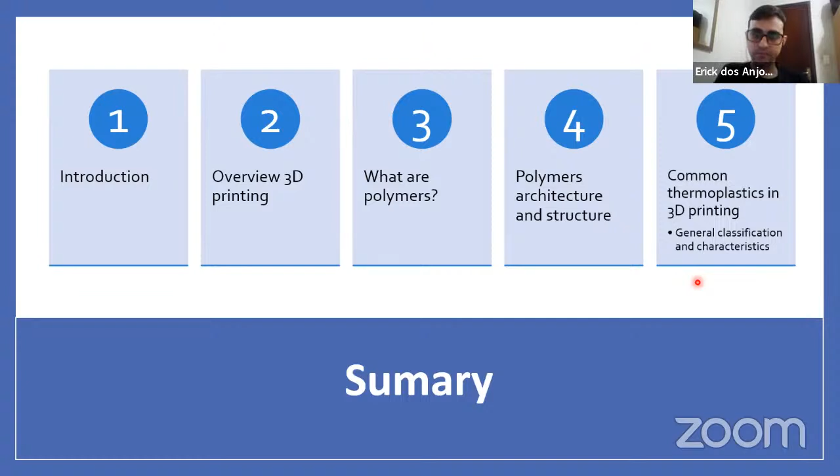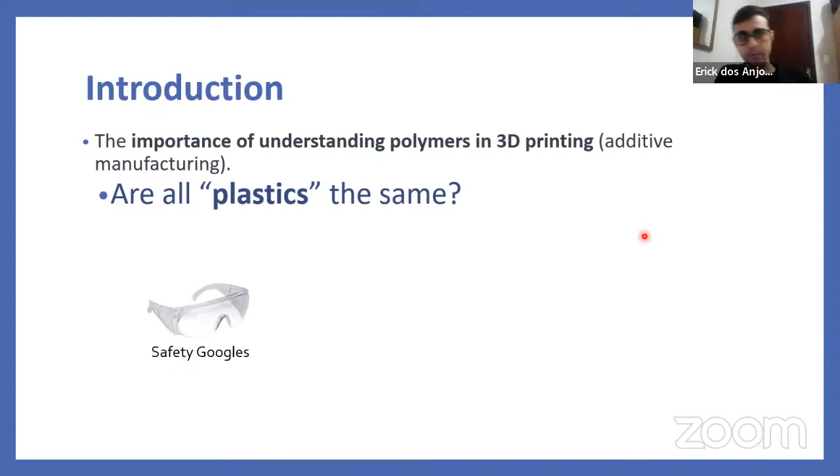Back to the polymers. Before delving deeper into the world of polymers, I think it's vital to recognize why polymers matter for 3D printing. And to start to construct this knowledge, I would start with a question. Are all plastics or polymers the same? What do you think about it? So to prove that polymers are not the same, I will give some everyday item examples here. For example, safety goggles, a pool ball, and a mattress sponge.

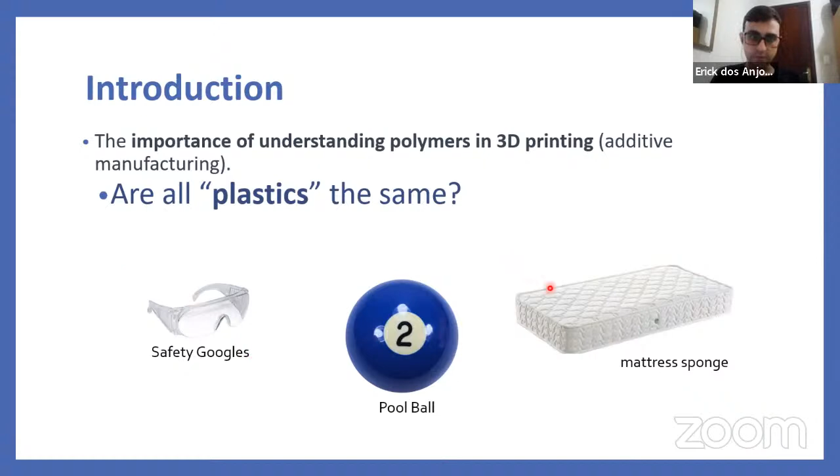The three products are made mostly from polymers. However, they have really different characteristics. A safety goggle is rigid and transparent. A pool ball is almost an elastic solid, while on the other hand, a mattress sponge is a really soft material. So why can polymers be so different from each other? This is one of the questions of this presentation.

From the previous question, an even more important question rises, that is, should I use the same material for all the prosthesis parts? What do you think about it? I think most of you think it's best to use the same material. Some of you diverge in this opinion. And this is a question that we will go back to at the end of the presentation.

Okay, so now, knowing that we are here at e-NABLE and the focus of e-NABLE is 3D printing, I think most of you have contact and experience in 3D printing. So I'll just have a quick review of some fundamental concepts of 3D printing.

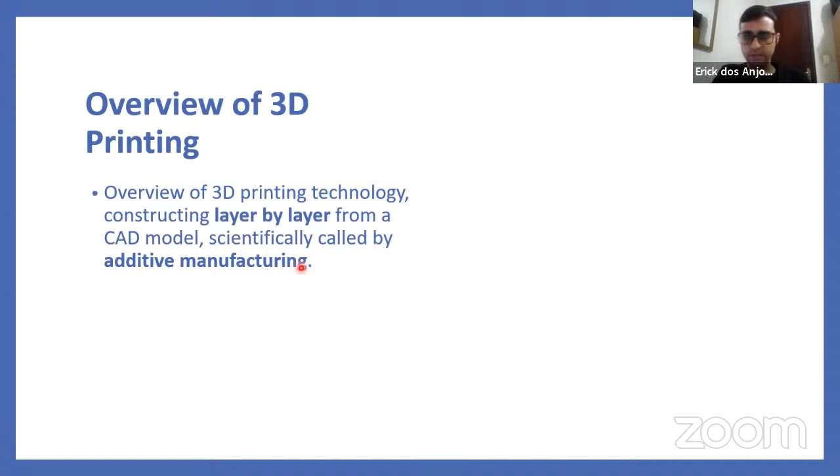So at its core, 3D printing is a family of manufacturing processes that builds any object, trying to construct the object layer by layer. And the idea is always based on a digital model. So 3D printing is really advantageous when we look for versatility, when we look for maximizing the material, so minimizing material wastage.

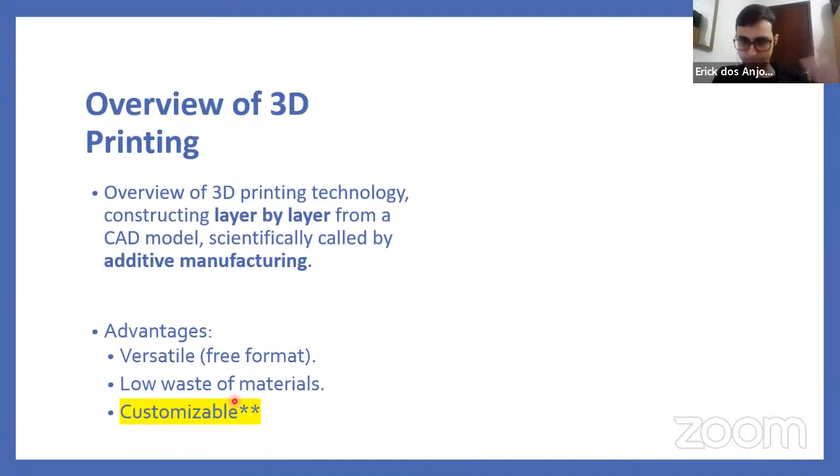And the strongest characteristic of 3D printing is the customization capabilities. Yes, so for medical devices and other industries like the aerospace industry, customizability is a really strong focus of 3D printing. Here we can see that 3D printing is actually the most cost-effective manufacturing technique for lower quantities, so customizable pieces.

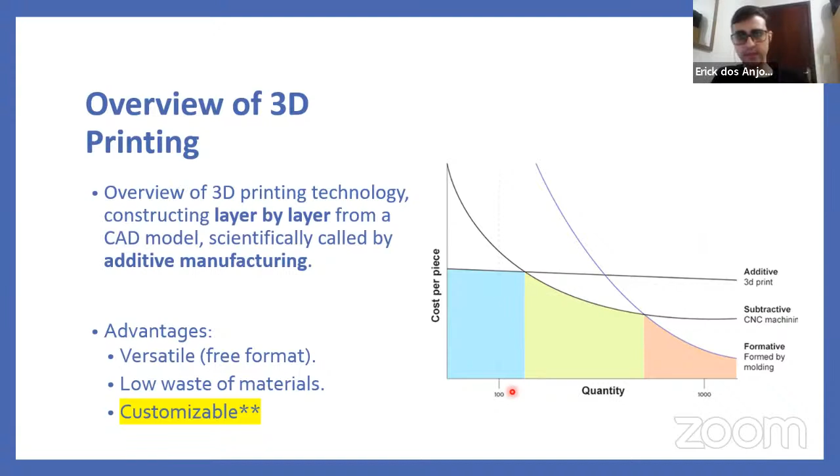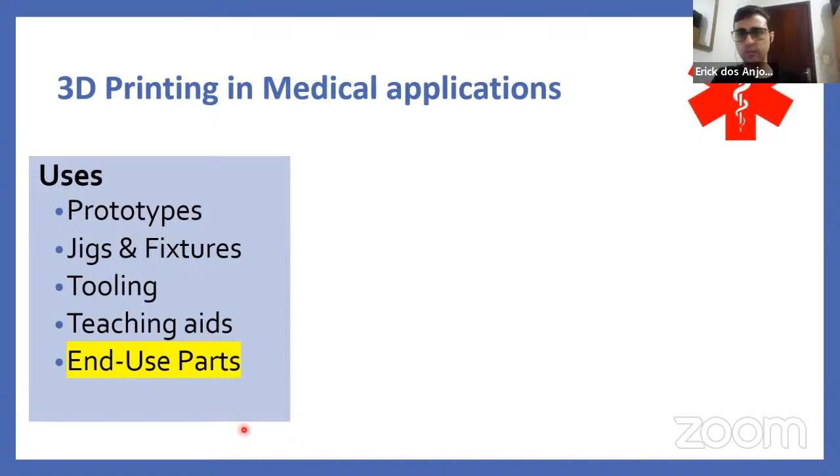One of the main applications of 3D printing is medical applications. In medical applications nowadays, 3D printing is used for prototypes, tooling, teaching aids, and in the case of e-NABLE for end-use parts also. And the great advantage of 3D printing in this case of medical applications is customization. However, medical applications have unique requirements.

The most difficult requirement to achieve for polymers is sterility, because for sterility we must undergo some severe physical conditions like higher temperatures, radiation exposure, chemical exposure, for example. All those can be harmful for the polymer structure in some cases, so not all polymers will satisfy sterility.

Another requirement for medical applications is traceability, so not all polymers are commercialized to be traceable. It's another difficult requirement to match. And the easiest to match for 3D printing is organic shapes, independent of being a polymer or other material.

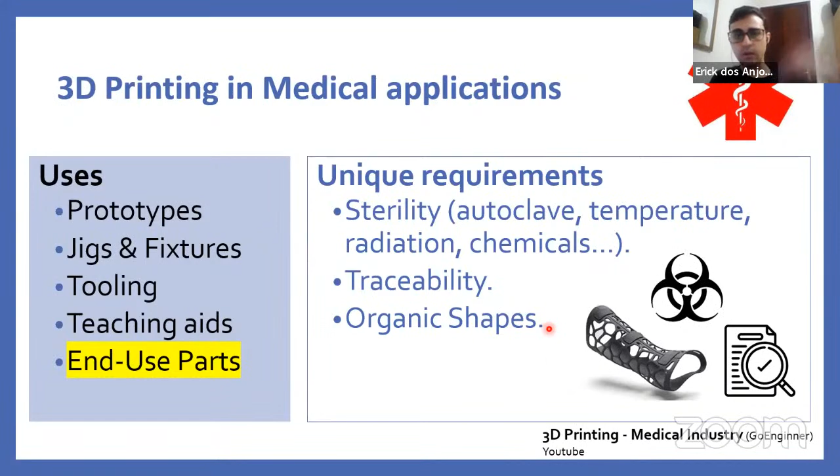Moving forward, we should understand that additive manufacturing encompasses a range of processes involving various materials and strategies. In this presentation, I'll focus on just polymer materials. So the techniques that apply most polymers are vat polymerization and material extrusion. Vat polymerization is commonly known as stereolithography, while in material extrusion, the most known process is FDM or FFF, the one that you use in e-NABLE.

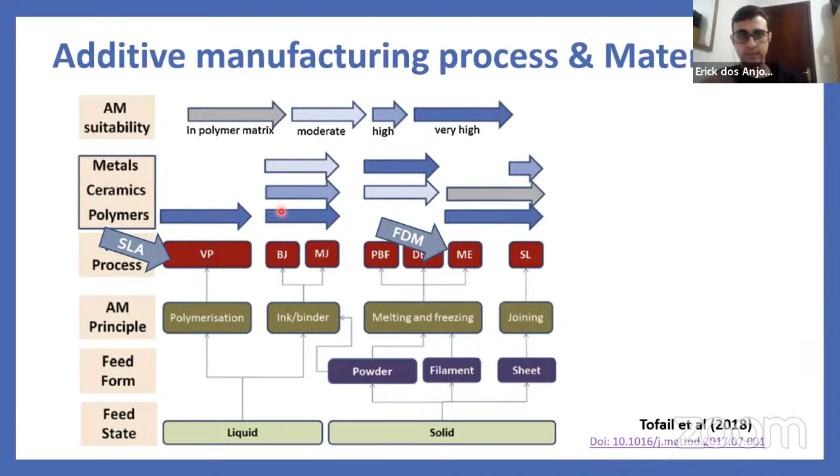So these two processes mostly apply polymers. This is why we're going to focus on polymers and especially on material extrusion in this presentation. However, we have other additive manufacturing families that can apply almost all types of materials: ceramics, metallics, composites, etc. Finally, with this brief foundation of 3D printing, we can delve into the core of the presentation, understanding the nature of polymers.

So polymers can be defined in various ways, okay? The most common definition is defining polymers as long chains or networks of repeating molecules, also called macromolecules. And what does it mean? It means that we have the same structure repeating multiple times to form the polymer itself, okay?

There is a big field to study polymers that we call polymer physics and chemistry. However, here I'll just give a brief introduction about this field, the main aspects that you have to keep in mind to better understand polymer physics and chemistry, okay? And I think the easiest way to approach this is from the materials engineering point of view, where we base the classification of polymers on their properties.

So we can have three major distinctions of polymers based on their properties. There are thermoplastics, simply called plastics, thermosets that come from liquid resins, and rubbers, okay? When we talk about thermoplastics, we have these two. They are the most used, the most known and simplest thermoplastics: polyethylene and polypropylene. These materials are just constituted by the simple structures here, repeating multiple times, forming long, independent chains.

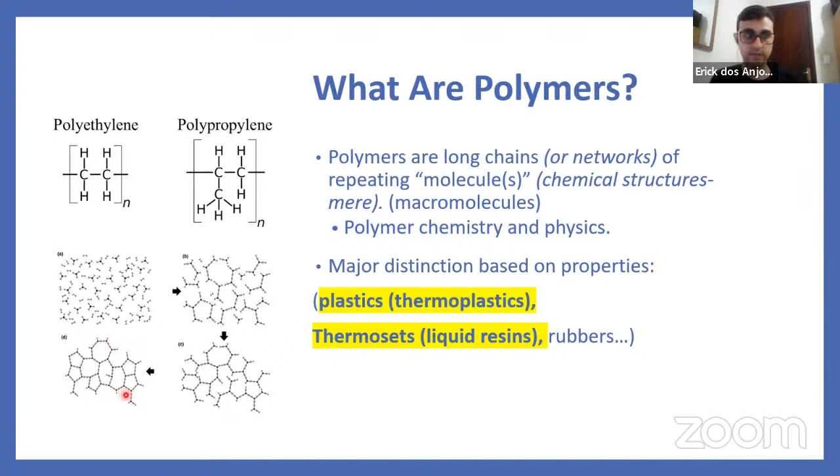Let's focus here more on thermoplastics. I think it is the material that we use most for e-NABLE end-use applications. We can have different kinds of thermoplastics. If you have one repeating structure like polyethylene, we call it a homopolymer. However, if you have more than one, we can make different types of structures called copolymers.

And copolymers can have different architectures and structures. These two terms here describe how the molecules bond to each other to form the polymer chains. And we can have different types of copolymers, alternating or block, for example. We can have different shapes of polymer chains.

This is important because, for example, with the same homopolymer, for example, polyethylene, if we change the chain configuration, we can have different properties of the polymer in the end. For example, linear polyethylene generally comes from high density polyethylene, which is tougher and stronger than a branched polyethylene that we call low density polyethylene that has longer branches here. So just changing the configuration of the chain, we can have different properties.

We can also have different types of polymers bonded together. In this case, we have grafted copolymers, where we have one backbone of one polymer and grafted chains of other types of polymers. This kind, for example, is the same that we see from ABS that I will talk about a little bit later. It is also an example that we can use this type of technology in a real-world application, a material that's already commercial.

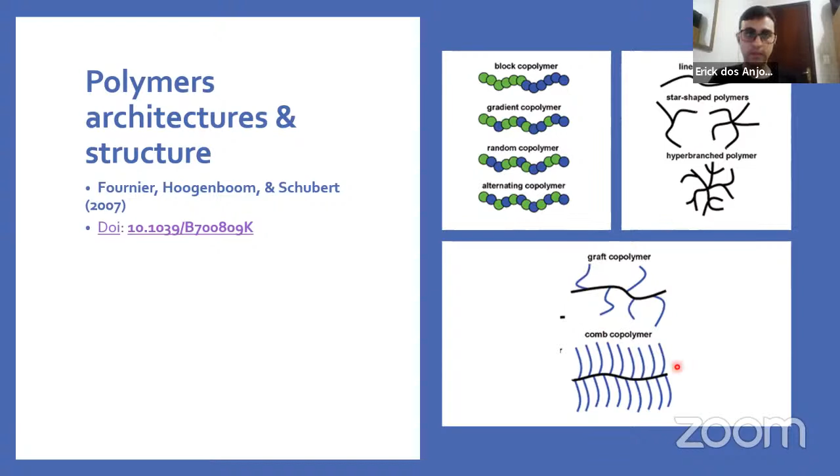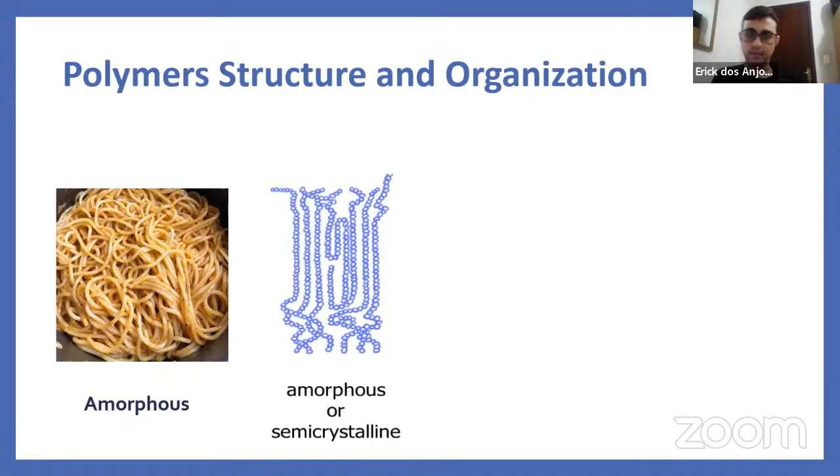Moving forward, we can talk a little about the structure and organization of polymers. So polymers in the solid state can also be differentiated in two categories. We call them amorphous and semi-crystalline polymers. When we picture amorphous polymers, we can imagine a plate of pasta. There are many strands intertwined and connected to a few others, not chemically, but just physically, they just anchor themselves. And when we pull one strand, you can move many others around it. So it behaves like a solid at room temperature, for example.

And we have another category that is semi-crystalline polymers. Semi-crystalline polymers have these crystalline regions called lamellae. These lamellae can be pictured, again as a culinary example, as a ramen noodle, where the same strands are folding and bending into each other to form a more packed, more regular structure. And this structure confers to the amorphous matrix many different kinds of properties. So it's more rigid, it's more resistant to solvents, to gases, for example.

And generally, these polymers can arrange the crystalline and the amorphous regions in many different structures. An example is these spherulites here, which are a regular circular structure of lamellae and amorphous regions.

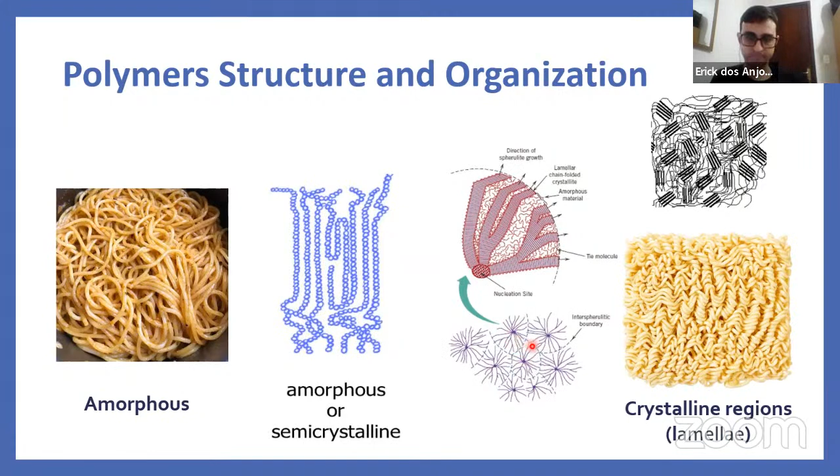The last part here that I will discuss about polymer architecture is the molecular weight, which is also really important for polymers. So having the same chemical structure repeating different times, which is indicated by this number here, N, which is the polymerization index, we can have different properties. I will show a practical example. For example, with this structure of polyethylene, if we repeat it just a few times, 12 to 18, we can have paraffin wax, which is a small molecule, not classified as a polymer, and has a lower melting point, okay, around 50 degrees.

If we increase this polymerization index to a higher number, for example, 3,000 to 4,000, we have HDPE, which is a polymer in this case with a melting point around 110 Celsius degrees, almost double that of the paraffin wax, and has excellent mechanical properties, tensile strength and modulus.

If we increase the polymerization index even more, we will have a polymer called ultra-high molecular weight polyethylene that is virtually not meltable. So you destroy the polymer before melting it, with a polymerization index really higher, 400,000, for example. This polymer has extremely good mechanical properties, however, it is really difficult to process, for example, so it's not much commercialized.

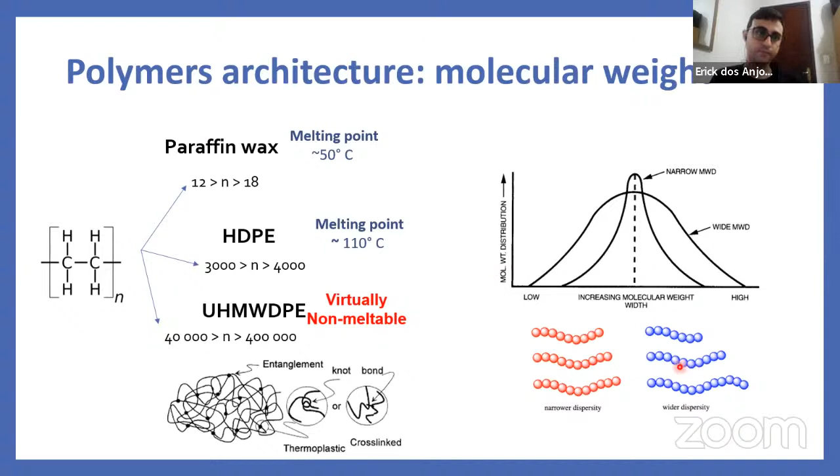Okay, so with this brief presentation of the main characteristics of polymer physics and chemistry, we can dive deeper into common thermoplastics focused on additive manufacturing. So when you imagine plastics for additive manufacturing, especially for FFF or FDM processes, we generally can classify these thermoplastics based on their properties. Again, in this case, we can divide them based on their maximum temperature of application, but it also stands for price or mechanical strength, for example.

In this classification, we can classify these plastics as standard, engineering, or advanced plastics. Standard plastics are applicable just at room temperature up to 100 degrees. If you need a material that resists heat more, we can have engineering plastics that resist up to 150 Celsius degrees. And if you need a really extreme condition, like up to 350 degrees, we will need advanced plastics. It's important to notice that price is another characteristic that varies a lot with the type of polymer we are talking about.

For example, when you compare PEEK, which is an advanced thermoplastic, its cost could be around $400 to $700 per kilogram, while a standard thermoplastic like ABS has a much lower price, around $17 to $25 per kilogram. This is just an example.

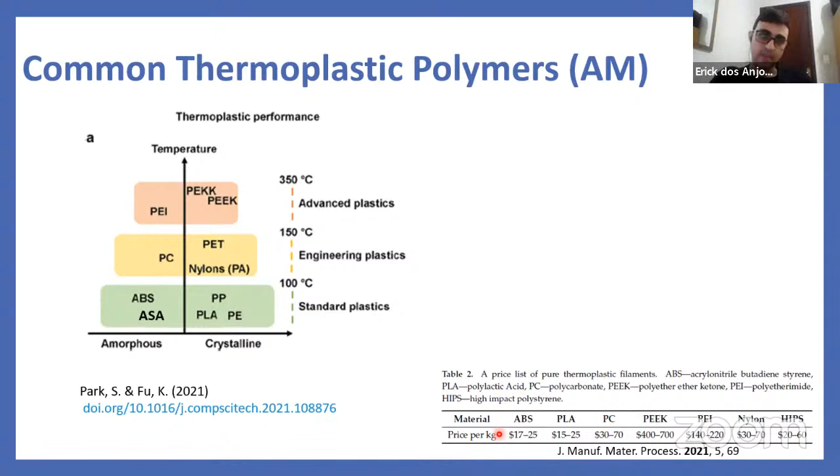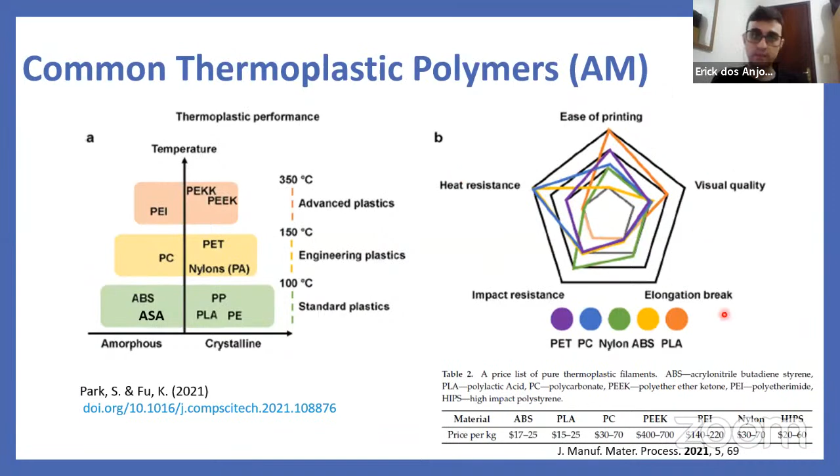Now let's take a closer look at the main characteristics of each polymer shown in the last slide. Each polymer has its own set of characteristics. For example, when you talk about application temperature—the temperature the material will be used at—this is limited by two characteristic temperatures. Polymers that are amorphous are characterized by their glass transition, while polymers that are semi-crystalline are characterized by their melting point or melting transition.

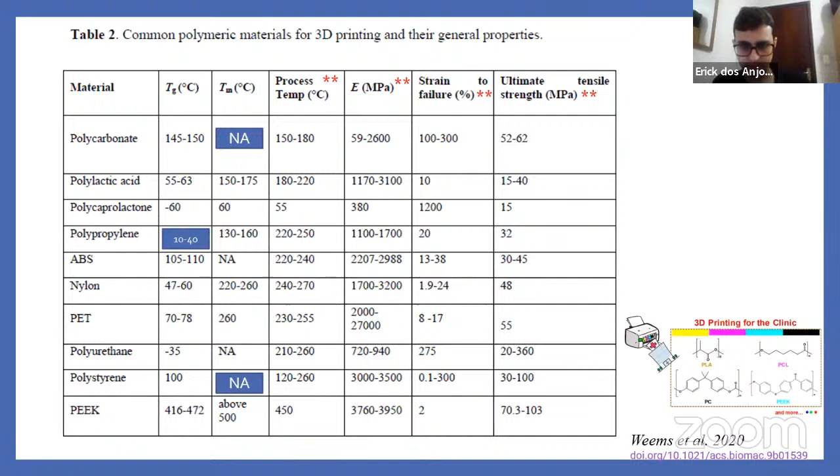When we talk about polymers for 3D printing in general, there are significant benefits. Polymers are the most cost-effective materials, they're versatile—different kinds can fit almost any application—they're light, and they're mostly recyclable in the case of thermoplastics. Some thermoplastics are even biodegradable. Their strongest characteristic for 3D printing is lower energy consumption during processing, which is why we can have polymer 3D printing at home. However, metal 3D printing probably can't be done at home because it requires a much higher amount of energy to melt or fuse the metal, or to power a laser. This is why polymer 3D printing can be so homemade, unlike other types of material 3D printing.

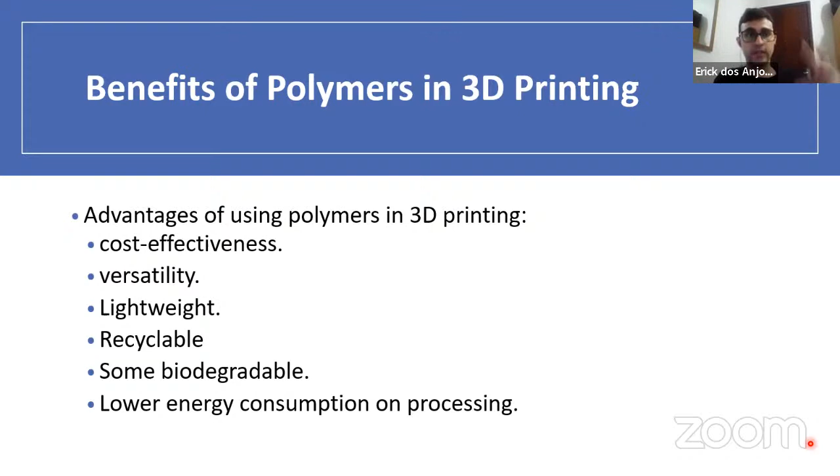So now I'll bring examples of the most applied materials, some advantages and disadvantages of applying each one, and their chemical structure, to understand a little bit how these things are connected.

The ABS matrix is a heterogeneous material, so ABS has characteristics of each of these structures. For example, acrylonitrile contributes thermal and chemical resistance to ABS, while polybutadiene contributes impact strength. This is why ABS has these types of characteristics.

ABS is a really versatile polymer. It can be applied for automotive parts, electronic housing, toys, and prototypes, and it's one of the most used polymers for 3D printing. There are some disadvantages though: ABS is really prone to warping, so if you don't have a heated table it's hard to print, and if overheated it might emit fumes.

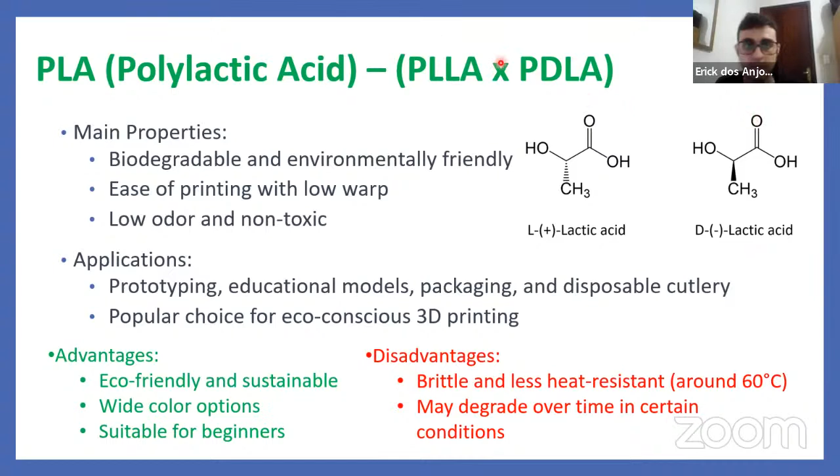It's not so easy to degrade in application conditions, okay? A curiosity here about PLA is that it has two optical isomers. Depending how the molecule is conformed, you can have L-lactic acid, or D, like PLLA or PDLA, as we call it. Commercial grades are generally mostly from PLLA, that is less brittle and easier to process than PDLA, but some grades can have a balance of both structures.

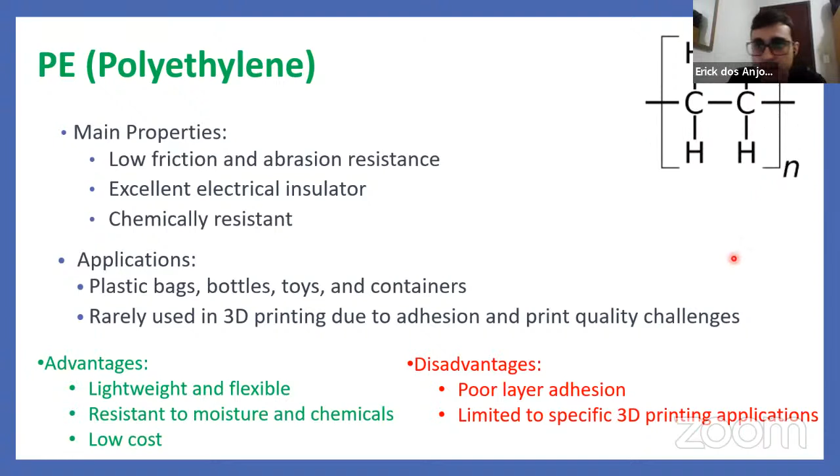Now we have other two standard polymers here, polyethylene, that I call a lot in this presentation. This is the simple structure. Polyethylene is actually in our daily lives, for example, in plastic bags. This polymer is versatile, has excellent electrical insulation and chemical resistance, and is really easy to process for traditional processing techniques like injection molding and extrusion.

However, this polymer is rarely used for 3D printing because it doesn't have good adhesion, neither in between layers nor in the 3D printing bed. So we have a real challenge trying to print PE, for example, due to this poor layer adhesion. This is why this polymer doesn't thrive too much in 3D printing.

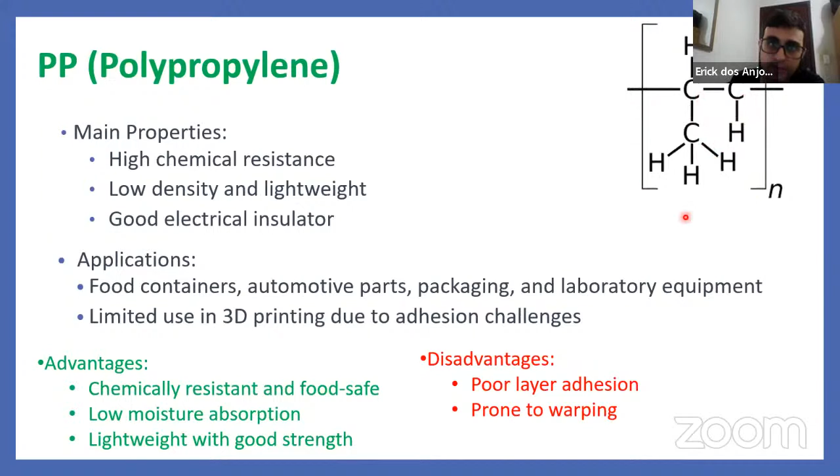Another polymer really similar to polyethylene is polypropylene, with just a methyl group substituting a hydrogen atom. This makes polypropylene harder and stronger than polyethylene. It's less flexible, but it's also stronger. Polypropylene is applied for food containers, for example, automotive parts, packaging—it's also a really versatile polymer.

It's really applied in the industry in general. However, polypropylene has the same disadvantage as polyethylene: its poor layer adhesion makes it really hard to print. So it's limited for use in 3D printing applications. This is why we don't see PE and PP in 3D printing as much as we see PLA and ABS.

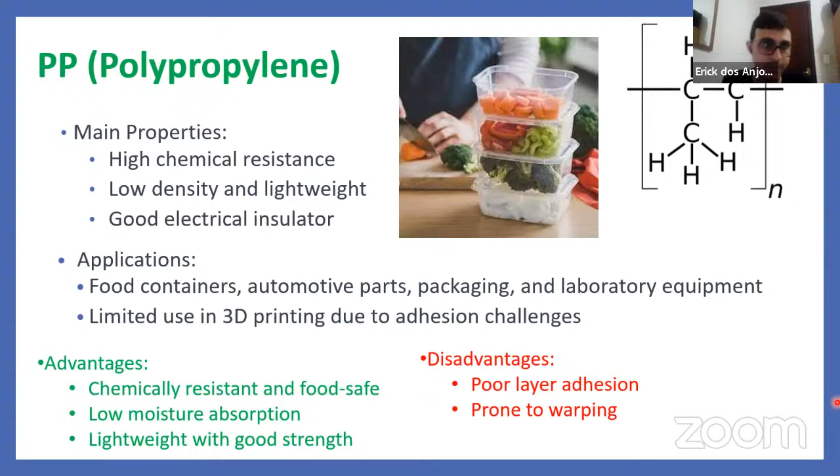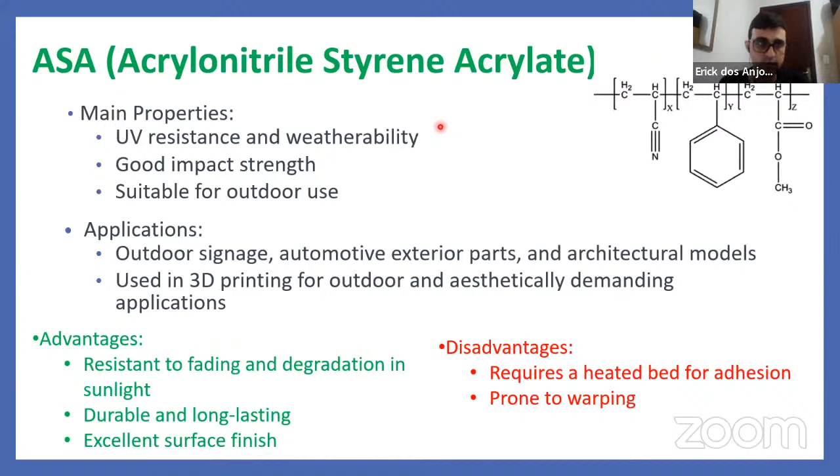The last standard polymer here we can see is TPU. TPU is standard in some cases, also considered an engineering plastic. TPU's characteristics are high flexibility, exceptional impact resistance, and good abrasion resistance. It's applied in industry for footwear, phone cases, seals, gaskets, and sporting equipment in general. It's extremely flexible and stretchable—when you're looking for a printed part that behaves like rubber, you should use TPU.

However, TPU has low heat resistance and might be prone to stringing during 3D printing. I think among all the thermoplastic polymers I'll talk about here today, TPU is the most complex one, because TPU is not just a simple chemical structure—it could actually be many different types of polymers together. For example, here I just showed the characteristic reaction between isocyanate and an alcohol group at the end of the chain, forming a urethane chemical bond.

However, this blue chain represented here could be many different types of polymers: polyester diol, polyether diol, different types of polymer diols. This is why it can have many different structures in the blue chains represented. And those blue chains are generally soft phases bound together by hard phases like this one. This is why we have the rubbery-like behavior, but it behaves thermally like a thermoplastic, not like a rubber.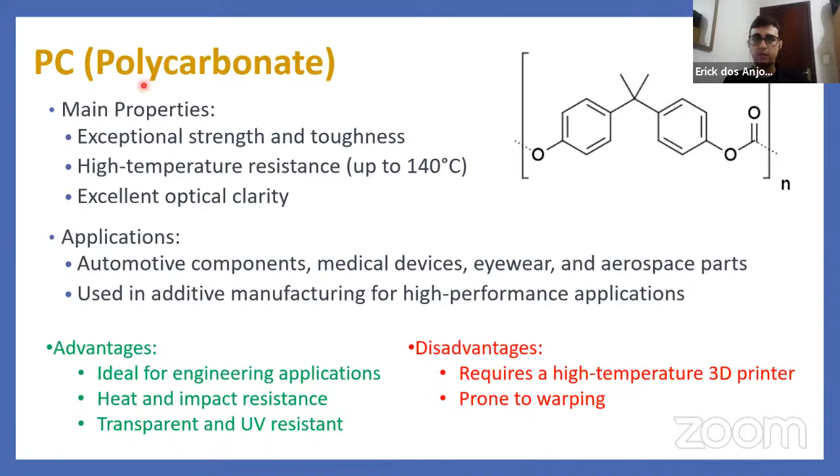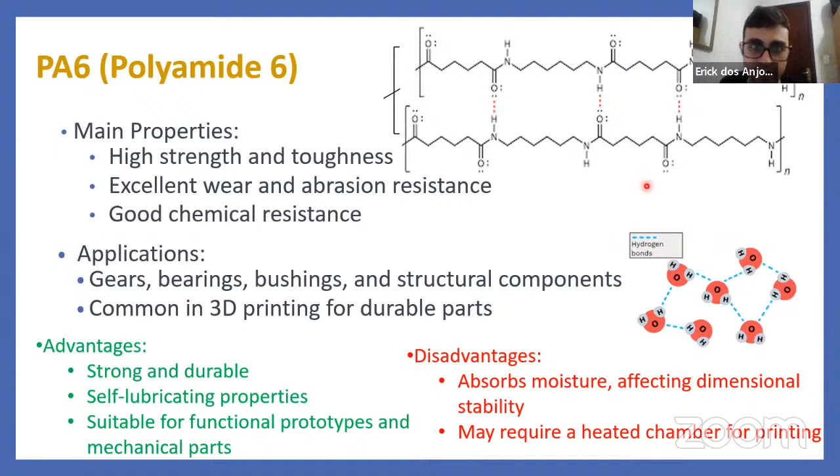It's applied in industry in many ways, for gears, bearings, bushings, structural components, for example. For 3D printing it's applied for more advanced parts and when we seek durable parts or parts that require much higher mechanical strength. The great disadvantage of polyamide 6 is that it absorbs moisture and it can change its dimensional stability. As we talked, polyamide 6 can make these hydrogen bonds here, and water also makes hydrogen bonds. So this is why these two can be so closely related and interact chemically with each other. This is why polyamide 6 absorbs moisture.

And for printing, we have to take care with moisture, have a heated chamber, and also a 3D printer that achieves higher temperatures. I bring here one example.

Here, just a brief perspective about, oh, Tainara, just open your microphone. Sorry. No, I prefer to raise your finger.

So raise my hand. I just have one question or two about the polymers you bring to us today, because of the prostheses and orthoses. Can we wash these polymers with soap and water, or will it change anything, or how long can they accept the cleaning, or how does it work?

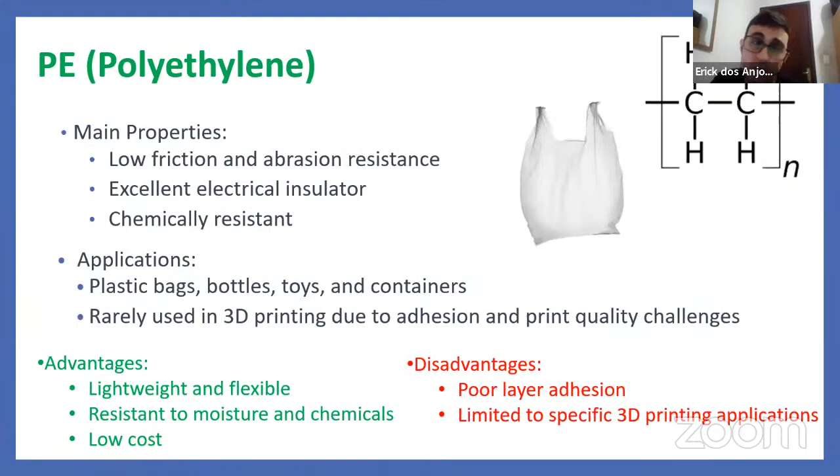Okay. And which of these materials is most suitable for contact with foods? Oh, I think none of those are food grade exactly. However, by what I have read, I think polypropylene will be good for food, and also PETG here, PETG is recommended for food, but I don't think those are food grade exactly.

So it's better when you're applying 3D printing to something that has contact with food that it doesn't have direct contact. It's just a support for something that will touch the food. The packing or something keeps protecting the food from the part.

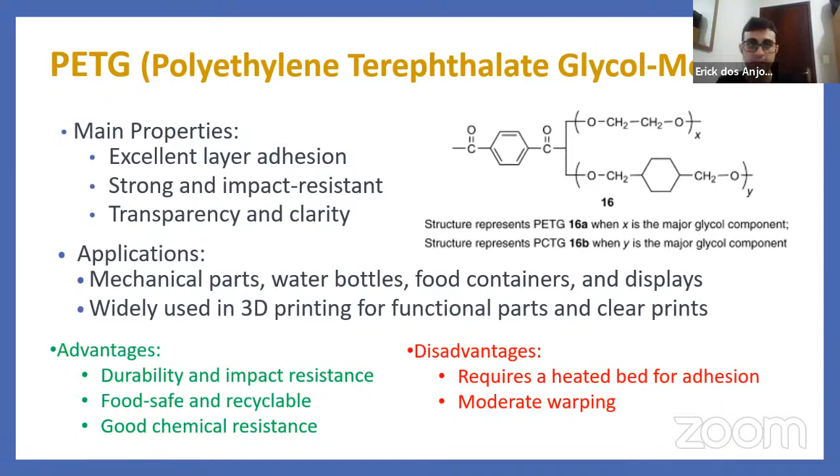Oh, okay. I think this is a kind of misinterpretation about ABS because, as I said, ABS just frees some harmful particles to the environment if overheated. So if you're working at the processing temperature, it's okay, it's not harmful. It can have a strong odor. It's a disadvantage of ABS. You can smell something, but it's not harmful.

It's actually a really small quantity, and the polymer itself is not breaking or freeing so many of these harmful molecules. This is why we use ABS in industry, and when you're working, for example, in an injection molding facility that injects automotive parts, which I have worked in, you don't have to use special face wear or something to work with ABS. It's just a smell. It's not chemically harmful for you.

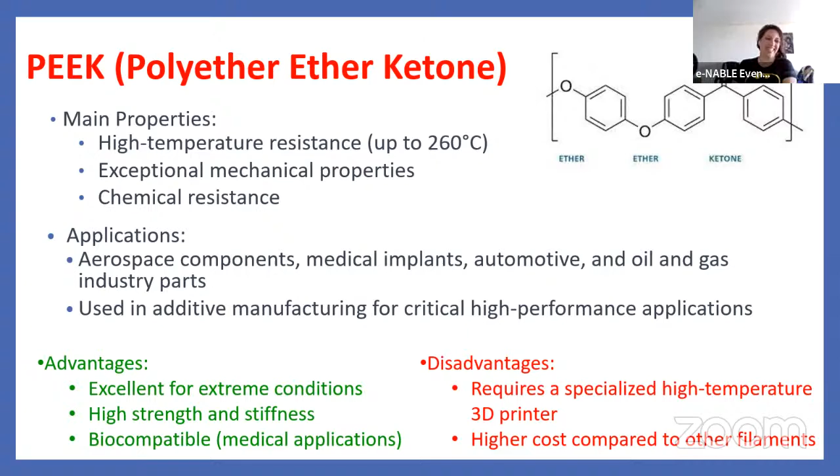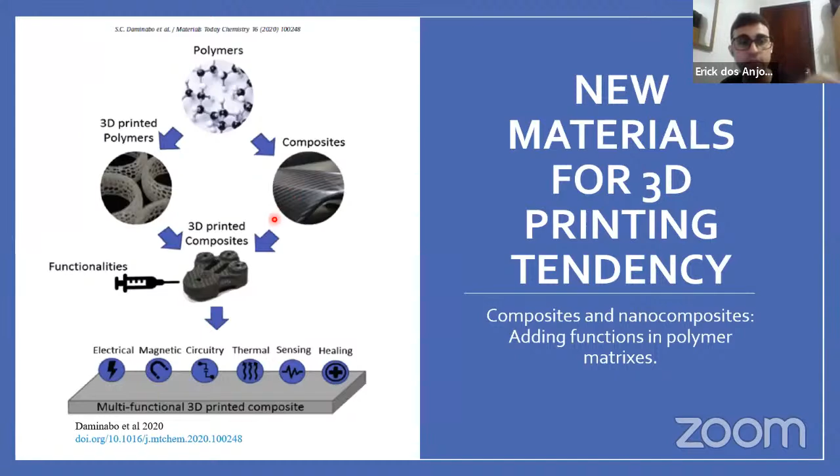For example, my PhD research is basically this idea. I mix graphene and carbon nanotubes into ABS and try to make it electrically and electromagnetically responsive. But you can actually use bioactive molecules to make it better for healing. Tissue engineering also applies lots of these ideas, not with ABS, but with other biodegradable matrices. So I think this is the strongest tendency: keep the same matrix we already have, but add new materials to make new kinds of nanocomposites with different properties.

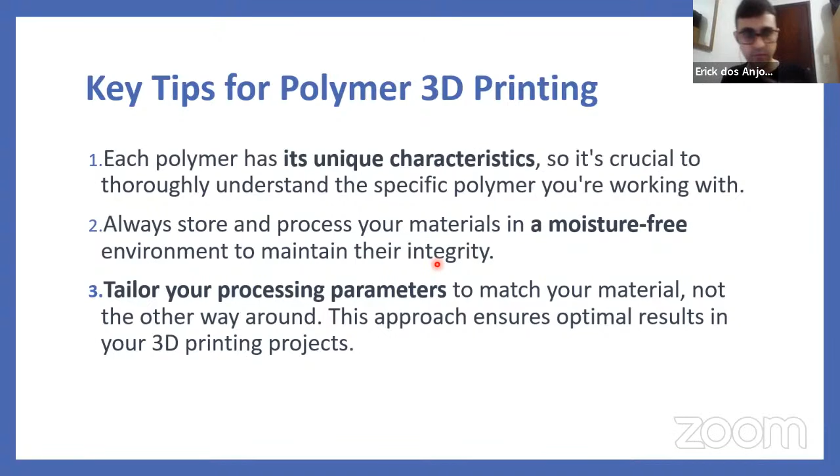And also we have to adjust the 3D printing speed and other parameters to try to match the parameters with the polymer that we are using. Tailor both things together, the polymer and the process. Here I have some recommendations. So here I just give a brief explanation.

My English wasn't so good, so if you are interested in more about polymer sciences and processing, I'm suggesting this discipline online, a graduate level discipline from Professor Nicholas Vogel, who is a wonderful professor, and all his content is free on YouTube. Just search for polymer science and processing by Professor Nicholas Vogel, and you can find a really good scientific and applied discipline of polymer science. I really recommend those of you who are interested in polymer processing science to watch his videos.

Another thing that I recommend here is the 3D printing medical industry video from GoEngineer. This video has some medical grades. They are actually sellers of 3D printing materials, so they recommend some medical grades, some different types of ABS that can be applied for medical uses, for example. It's really interesting. So I suggest you watch this video, especially focused on the materials they sell.

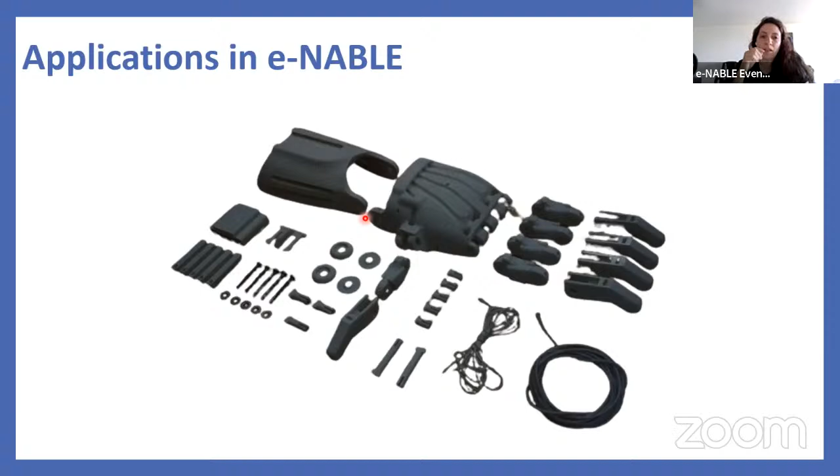Okay. And have you had any problem joining different polymer types? For example, when you have a part of ABS with a part of PLA, do you have some kind of trouble in long life applications? No, they just need to be well printed, and just these two parts that I said. If one is PLA and the other is ABS, they don't match, so it's a problem, because ABS is very resistant, it has good heat resistance, so it's very difficult. But for the other parts, ABS gets better quality than PLA sometimes, so it's even better to do them with ABS. I don't like ABS, but I know it's very good.

I remember when I was helping you in your master's degree, when you were studying mechanical properties of 3D printed parts. Most of the time, it's not the material, it's how you print. Because if you have any printing defects, your mechanical resistance goes down to zero. So I think printing quality is more important than the material sometimes when you're thinking about applications for persons. Yeah. It's because the prosthesis is like a puzzle. If you buy a puzzle with wrong pieces, you can't play.

So it's like the prosthesis. If you take the procedures and take everything and just put it together and it's not good, it doesn't work well. So sometimes you can see some people with the prosthesis that don't close the hand a lot. So sometimes it just comes to here, not to here and everything. So we need to print with quality. I think we need to understand the polymers and 3D printing and the materials and everything to make a good prosthesis. Excellent, excellent. This is the conclusion here, I think.

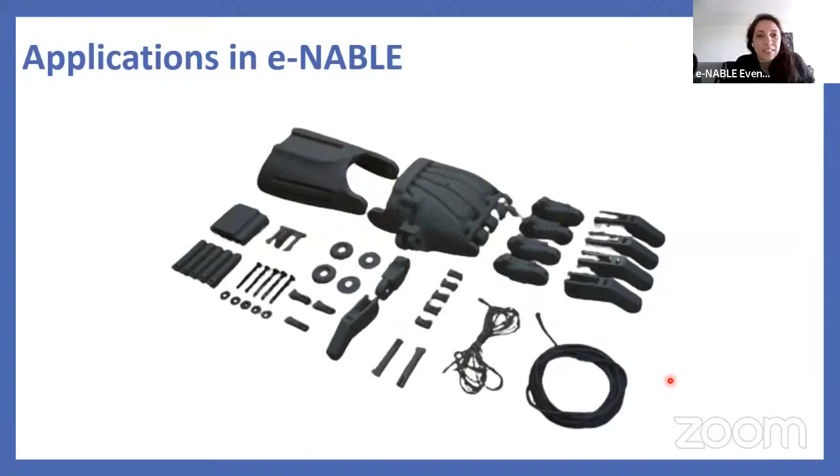Wow. Something more you want to add? No, just thank you for the attention. It was really fun to be here with you today. I was freaking out, nervous, but now I'm okay. I hope you have learned something. I don't know why your English is perfect. You look like an American. Oh, it's fun. No, no, no.